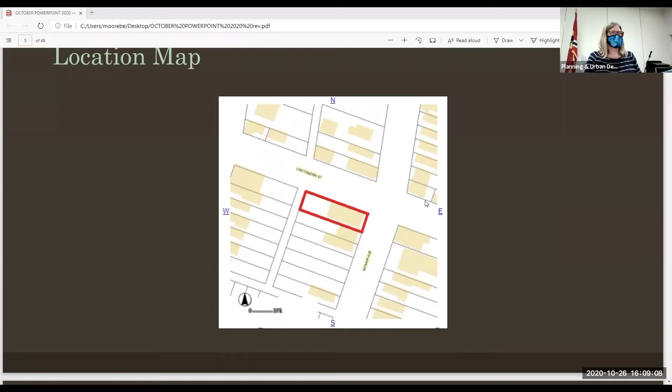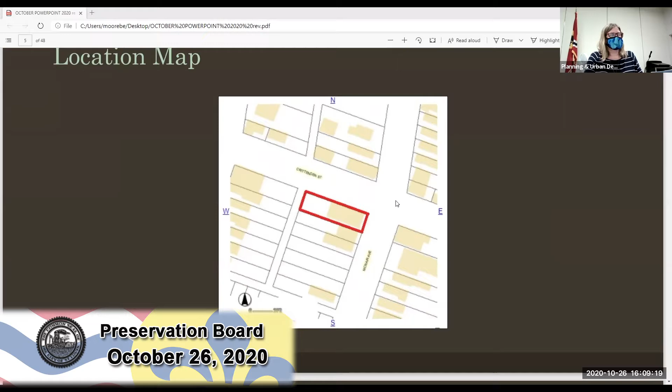This is the building at 3001 McNair, on the corner of Chittenden and McNair. You may remember this location from a few months ago when they applied for a fence permit. So this is the change of course. This is the site where construction has already started on the base of the porch, and the fence will run alongside the edge of the building, back.

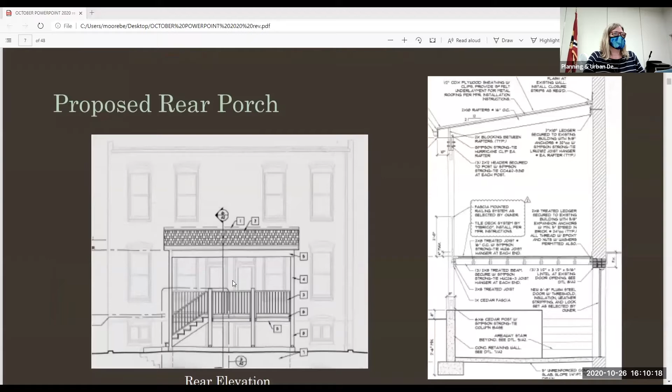The proposed changes do not comply, as previously approved. Proposed changes in the porch do not follow the model example. Metal handrails and bow stone tiles historically were not on rear porches. At the same time, if there was a concrete porch, a metal handrail would be appropriate, which is what was there previously. The plan shows they did change the metal roof to an asphalt shingle roof, but they're still wanting the metal handrails and the bow stone tile.

I have two letters to read into the record. One is from the Benton Park Neighborhood Association from President Donald Morgan. In reviewing the appeal heard for 3001 McNair by the Preservation Board at the October 2020 hearing, Benton Park Neighborhood Association appreciates upholding the Benton Park Historic District Building Code. In reviewing construction documents prepared by the architect, Hendrick Design, the architect has modified the drawings at the owner's request to utilize a compliant roof shingle. Roof material will be a very visible feature of this addition. Regarding the two other attributes of the structure, the railing system and the tile finish for the deck, Benton Park Neighborhood Association's observation is the feature will not be visible.

In a previous Preservation Board hearing, the board gave consent to the property owners to construct a 6-foot-high non-compliant fence utilizing horizontal fence boards, even though Benton Park Historic District Code specifically states the fencing materials should be oriented vertical. Thus, the railing system and tile decking surface will not be visible from the public right-of-way. As such, Benton Park Neighborhood Association requests that the Preservation Board permit the owners to construct the deck addition with a shingle roof, metal rail system, and tile decking system.

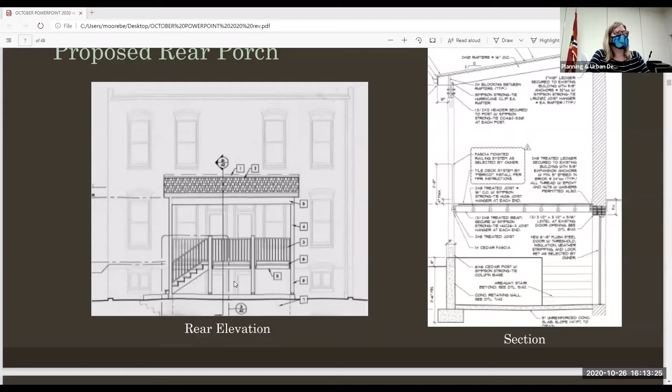Questions? Commissioners, are there questions for Ms. Gagan? There's a picture of the tile. Go ahead. No? Yes.

Okay, then let's hear from the appellant. Mr. Steele, Ms. Steele, we are here. Thank you again for inviting us back. We didn't expect to be back here so shortly, for sure. I think we were just a bit surprised that what we had proposed was not meeting standards.

But we have put together this presentation. It's actually very similar to the last presentation that we went through. We went on about a 15-minute golf cart ride creeping up and down alleyways, getting some pictures of existing porches and decks that have both metal railing and wood surfaces as well. So we can just kind of go through here and quickly run through some pictures. Andrew, if you wouldn't mind going through.

That was what was here before we started ripping this off. It's concrete and steel. What we're trying to do is replicate not only the concrete and steel look that was existing, but also match what we have on the front of the house as well. So you go to the next.

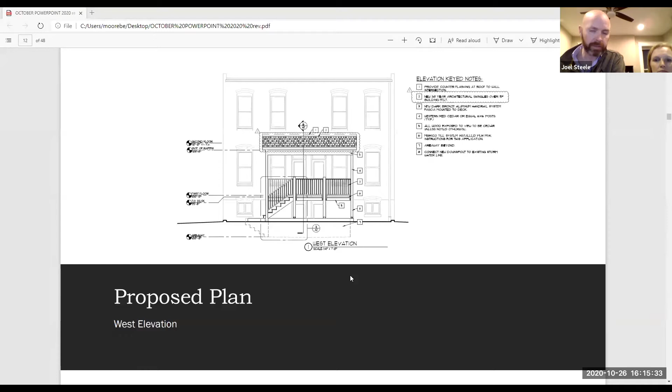This Andrea already showed this right here. So we've changed the steel roofing to be shingle. Actually, the only reason we had steel roofing in the first place was because of the slope of the roof, such that water flow coming off of that roof on a steel roof was going to be much easier, much better than on shingle. But we can make some other alterations to make that work. So we're fine with going with the shingle.

Go on to the next slide if you don't mind. I think we can scoot right through here. It's just another elevation of what it looks like. Andrea already went through the objections, so we can go on to the next.

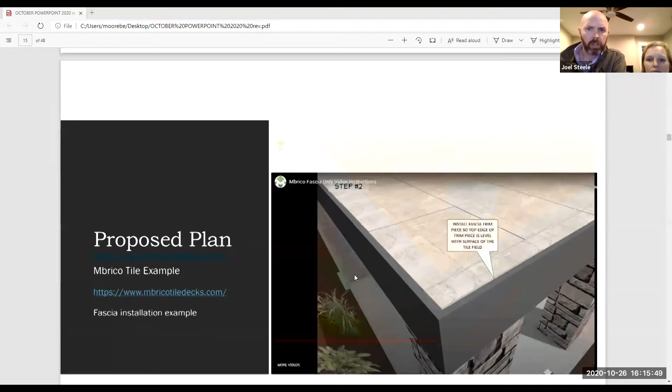This is just a screenshot of a video of the Mbrico tile system. The fascia board comes up to level with the tile, so even without a fence, you would really not even see the tile system. Really, you just see that wooden fascia board. That's just to give a representation of how the installation would go.

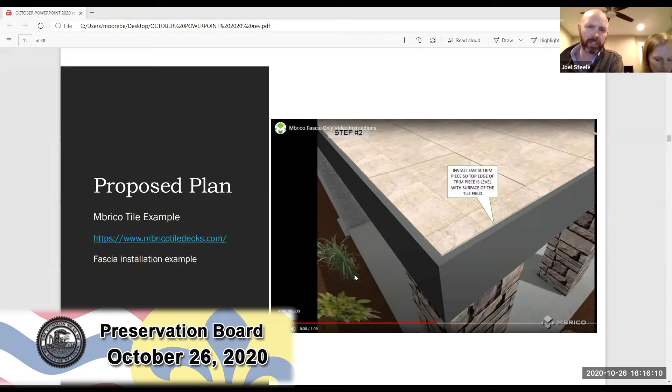We can go on to the next one. This is from the Mbrico site, just shows what some of their tile decking system looks like. You can go on to the next. There's another one. This is actually from an install in Webster, from the contractor that we would probably use to install it. But even so, this is an Mbrico tile system used locally, not in the neighborhood, and it's a different color, but just an example of what is currently out there.

Next slide. This small square in this picture is laid up against the concrete that we have in the front of our house. Concrete in the front of our house is dirty, so if it were clean, it would be a much better match. But that stone that we have on the front that we're trying to put in the back, we're trying to match with the front concrete that we have as well.

Next slide is that same tile against the front limestone steps that we have in the front as well. Again, not a perfect match, but similar texture and similar overall look that we're really trying to replicate.

This is, and we'll just go through a bunch of examples. This is actually our house back from before we did the gut rehab several years ago. You can barely see it there, but that deck system that's there right now is wood with metal spindles, metal railing. Just to use as one example of wood and metal being used on a historic structure, and stone. Next, we'll just go through these quickly.

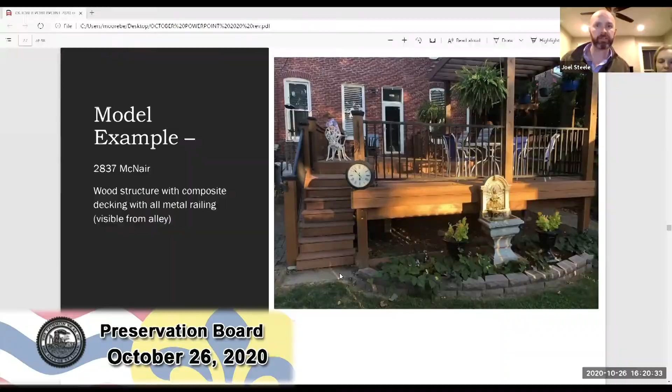We could go on to the next. This is a back deck, again wood structure, metal balusters on McNair, visible from the alley. Same thing here, and the house right next to it, or 2 doors down, I think - same type deal. Lots of metal railing that we could find in the neighborhood.